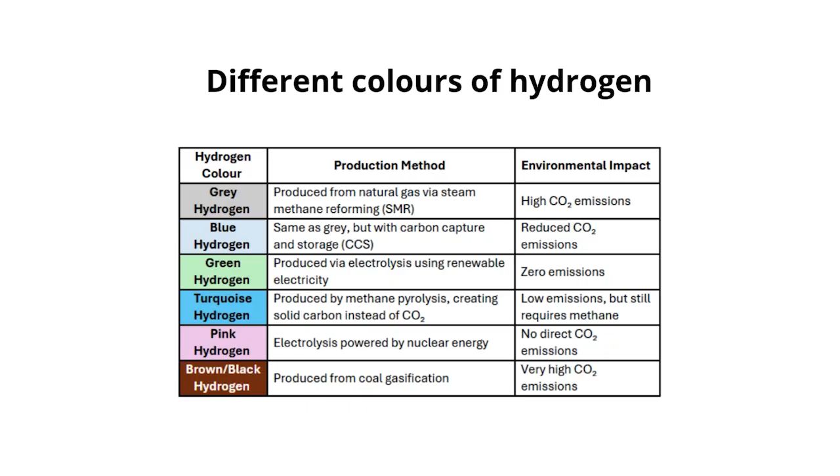Let's first look into gray hydrogen. Hydrogen itself is always the same, but the color tells us about the way it is produced. Gray hydrogen is made from fossil fuels, most often natural gas. The main method is called steam methane reforming. In this process, natural gas, which is mostly methane, is mixed with very hot steam at around 700 to 1000 degrees Celsius. The heat and steam break the methane apart into hydrogen gas and carbon monoxide.

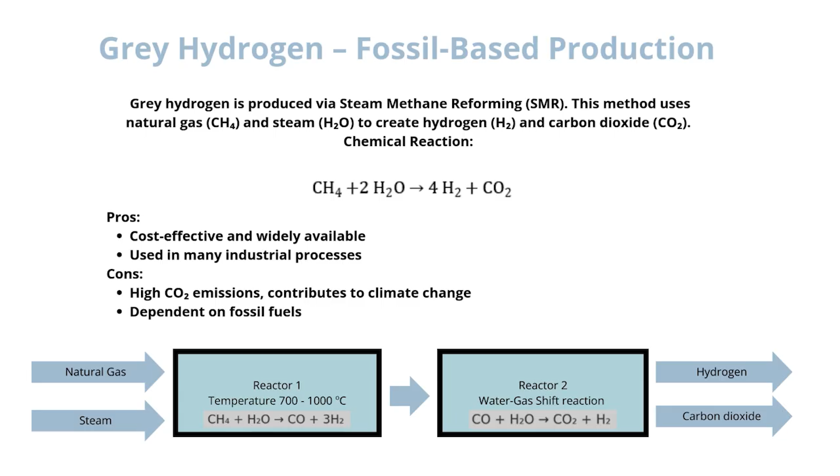In a second step, the carbon monoxide reacts with more steam to create even more hydrogen, but also carbon dioxide. This method is cheap and well established, which is why it is used on a very large scale today. In fact, most of the world's hydrogen is still produced this way. But the big problem is that all of the carbon dioxide produced is released into the atmosphere. That makes gray hydrogen a fossil-based fuel with a large carbon footprint.

Next, we'll talk about blue hydrogen. Just like gray hydrogen, it is produced mainly from natural gas, using the process called steam methane reforming. Methane reacts with hot steam to produce hydrogen and carbon dioxide. The important difference is that, in blue hydrogen production, the carbon dioxide is not simply released into the atmosphere. Instead, special technology is used to capture the CO2 before it escapes. This is called carbon capture and storage, or CCS.

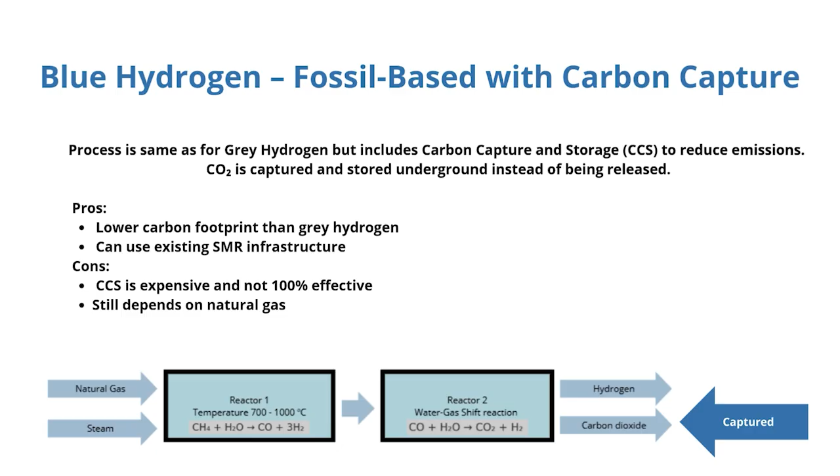The captured CO2 can then be stored deep underground, for example in old gas fields, or used in some industrial processes. Because the carbon dioxide is captured, blue hydrogen has a smaller carbon footprint than gray hydrogen. It is sometimes called a bridge solution, because it uses existing fossil fuel technology but tries to make it cleaner.

Now let's look at green hydrogen. Unlike gray or blue hydrogen, green hydrogen does not come from fossil fuels. Instead, it is made using renewable energy sources, such as wind, solar, or hydropower and water. The production method is called electrolysis. In this process, electricity is passed through water, splitting it into hydrogen and oxygen. The hydrogen is collected as a clean fuel, and the oxygen is simply released into the air.

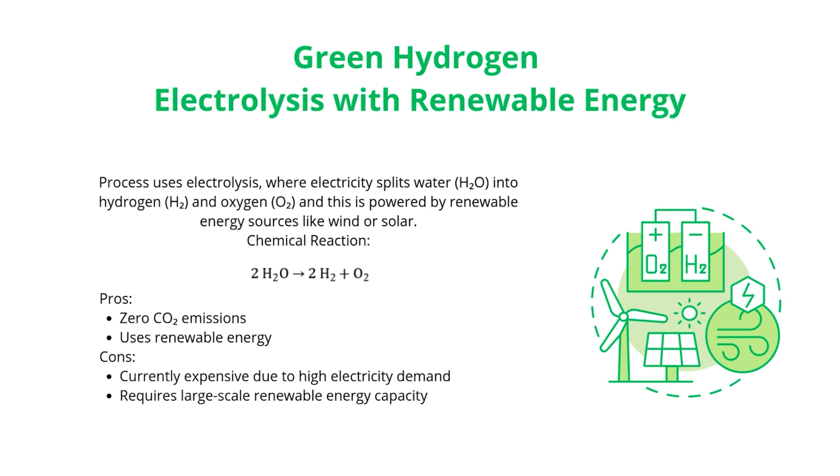If the electricity comes from renewable sources, the whole process produces almost no carbon emissions. That's why we call it green hydrogen, as it's the most environmentally friendly option. Green hydrogen is often seen as the future of hydrogen production, because it can provide clean energy for industries, transport, and even heating, without adding greenhouse gases to the atmosphere.

Now let's look at turquoise hydrogen. This type of hydrogen is made from fossil fuels, usually methane or natural gas, but with a different method compared to gray, blue, or green hydrogen. The process is called methane pyrolysis. In methane pyrolysis, natural gas is heated to very high temperatures in the absence of oxygen. Instead of forming carbon dioxide, the carbon in the methane separates out as a solid material.

This solid carbon is much easier to store or use than carbon dioxide gas. For example, it can be used in industries to make products like batteries or construction materials. Because no carbon dioxide is released, turquoise hydrogen can have a much smaller impact on the climate. But it depends on how the high heat for the process is produced. If renewable energy is used, the process can be quite clean and its footprint very small.

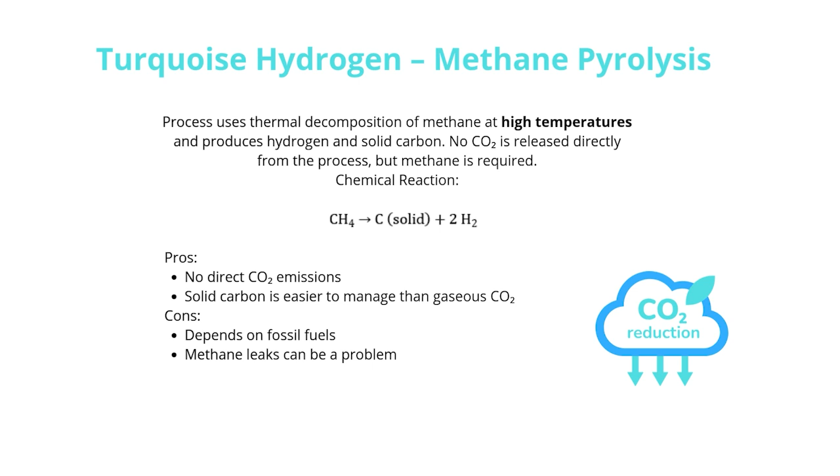Next, there's pink hydrogen. Pink hydrogen is produced in the same way as green hydrogen, through electrolysis, where electricity splits water into hydrogen and oxygen.

The difference is in the source of electricity. For pink hydrogen, the power comes from nuclear energy. Nuclear power plants can provide a steady, reliable flow of electricity, which makes them well suited for running electrolyzers day and night. Because nuclear energy does not produce carbon dioxide while generating electricity, pink hydrogen is considered a low-carbon option.

It can be especially useful in places where renewable energy like wind or solar is not always available, but where nuclear energy is part of the energy system. Though it is not producing carbon dioxide, its waste is considered a challenge. Nuclear energy creates radioactive waste that must be carefully stored and managed for thousands of years.

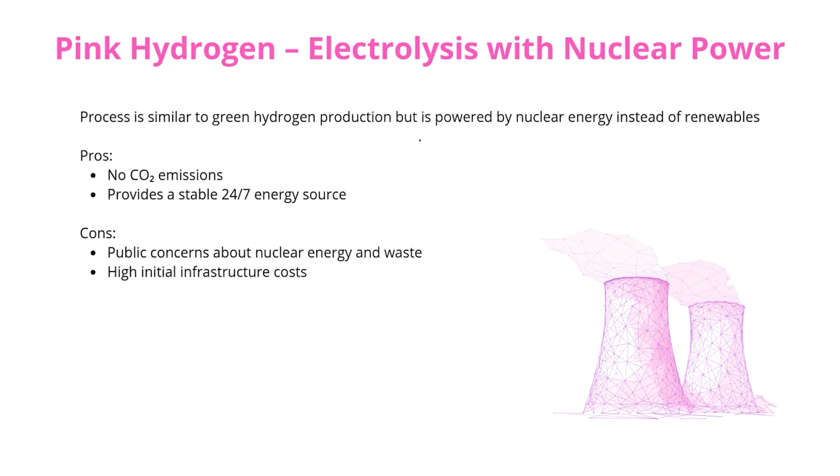Because of this, pink hydrogen is sometimes debated. It is low carbon and reliable, but it comes with concerns about safety, waste storage, and public acceptance. Still, many see pink hydrogen as an important option for producing clean hydrogen, especially in countries that already have nuclear power plants.

Now there's brown hydrogen left, also called black hydrogen. Brown hydrogen is produced from coal, especially lignite. When harder and darker coal, like bituminous coal, is used, the product is often called black hydrogen. The production method is called coal gasification.

In this process, coal reacts with oxygen and steam at very high temperatures. The result is a gas mixture called syngas, which contains hydrogen, carbon monoxide, and carbon dioxide. From this mixture, hydrogen can be separated. However, this method produces large amounts of carbon dioxide.

In fact, brown and black hydrogen are the most polluting types of hydrogen production, because coal has a high carbon content compared to natural gas. The released CO2 contributes heavily to climate change. Some countries still use coal gasification, because coal is cheap and widely available.

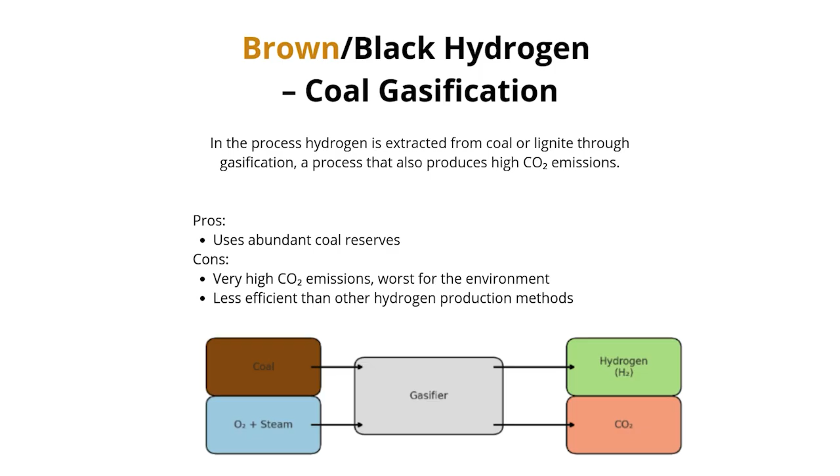But from an environmental point of view, brown hydrogen is not sustainable, as it produces very high carbon dioxide emissions, and it is considered the dirtiest hydrogen option. Now we have learned that hydrogen can be produced in several different ways, and each method has its own benefits and challenges. Let's compare them by looking at 3 key points: emissions, energy sources, and costs.

Grey hydrogen is made from natural gas using steam methane reforming. It is the cheapest and most common method, but it releases a lot of carbon dioxide into the atmosphere. This makes it a high-emission option. Blue hydrogen also comes from natural gas, but here the carbon dioxide is captured and stored with carbon capture and storage (CCS) technology. This lowers emissions compared to grey hydrogen, but CCS increases the cost, and it does not remove all of the CO2.

Green hydrogen is produced by splitting water using electrolysis powered by renewable energy sources like wind or solar. It has almost zero emissions if renewables are used. The challenge is cost, as electrolyzers and renewable electricity are still expensive, though prices are expected to drop in the future.

Turquoise hydrogen is made by methane pyrolysis, which produces hydrogen and solid carbon instead of carbon dioxide. Solid carbon is easier to handle than CO2 gas, and it can be used in industry. The emissions depend on how the high heat for the process is generated. Costs are currently higher because the technology is not yet widely used.

Pink hydrogen is similar to green hydrogen, but the electricity comes from nuclear power. It has very low carbon emissions and provides a steady, reliable energy source. However, it is linked to nuclear waste management, and the costs depend on nuclear energy availability.

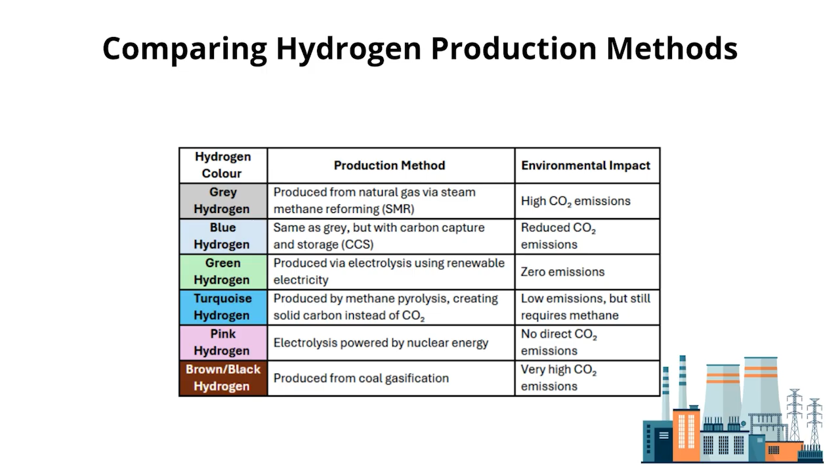As a summary, the cheapest methods today are grey and brown hydrogen, but they cause the highest emissions. Blue hydrogen is cleaner, but costs more. Green and pink hydrogen are the cleanest options, but today they are still the most expensive. Turquoise hydrogen could become a good middle option if the technology develops further.